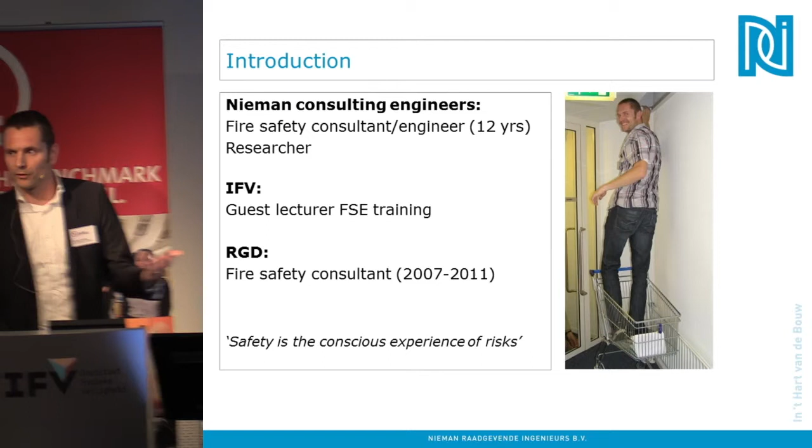I'm the fire safety consultant. And at the IFV here, I'm a visiting lecturer in fire safety training, including fire safety engineering. And I was seconded for the State Building Service as a fire safety engineer. So I'm involved mainly at the front end of operations. And I'm from the practice, but I see very few fires in practice. And I'm peripherally involved in the trials in Zutphen, but that's also very peripheral.

This shows me in a different capacity. In safety engineering, they often describe safety as a deliberate experience of risks. I'm taking a certain risk here, and the question is whether this was deliberate. Retrospectively, perhaps it may not be, because one of those shopping carts can handle about 110 pounds. Well, I'm slim, but I'm not that slim.

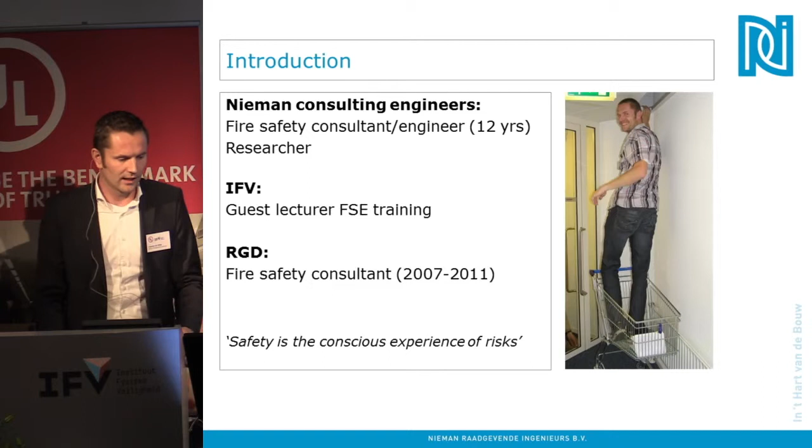So you might say that the subconscious experience of risks figures in our fire safety in buildings as well, because we observe rules and think that they feel safe to us and comfortable. So we accept a residual risk without knowing what that residual risk is. So how aware are we of our risks?

If you look at rule-based, you might encounter these situations. I don't know whether these all relate to rules, but I'll tell you about a few of them. At the upper left, they decided they wanted a sign warning us about geese. And there is a warning sign there. But we don't have a picture of geese, so we put a cow on instead. So you might wonder, what do you need to watch out for, cows and geese, or neither of the above?

At the lower right, there's a road here. And apparently there are a lot of things you're not allowed to do, so perhaps you'd have to stop and take a look to see what's not allowed here. And probably you need a sign to denote every single rule and prohibition. And what went wrong at the upper right, you don't know whether that relates to rules. Perhaps each apartment at the upper right needs to have a balcony, whether or not the balcony is accessible. Well, that's pretty odd if you wind up in one of those buildings.

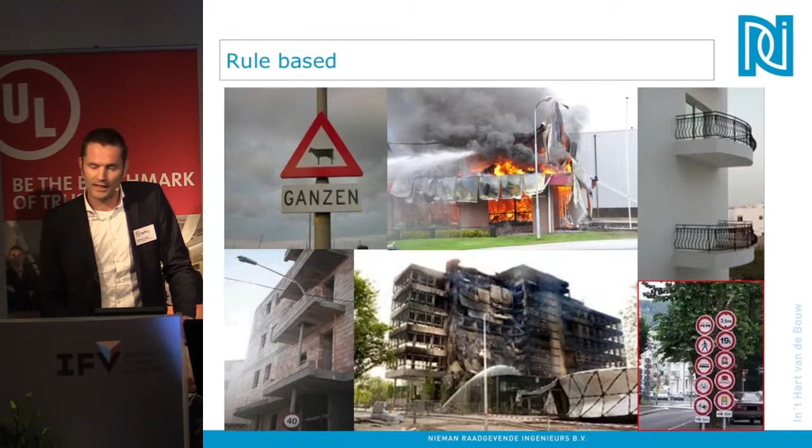Now, if you look at fire safety and look at the middle two pictures, well, they're entirely in compliance with the rules. You see that TU Delft, which is burned down, and you can see that a burned out building fits perfectly within our regulations. And we thus accept a lot of risks.

Now, zooming in on those regulations, if you look at the Construction Act, there are two targets: preventing casualties by fire and preventing fire damage to adjacent premises. Uitgebrand - think of those pictures. It's perfectly easy to have a building burned down without any victims or the fire spreading to the adjacent buildings.

And the other targets don't figure in our regulations. Think of loss prevention, whether it's material or immaterial, or social damage, or sustainability. Those are private objectives, and they're not regulated.

Well, what do the regulations serve? They concern rule-based performance requirements, which target safeguarding a certain level of fire safety. There are no specific objectives in the order of magnitude of victims or loss, and the safety consequences of those buildings vary. So you can have one set of regulations, but they don't have the same safety consequences. And the principle is ideal use of buildings.

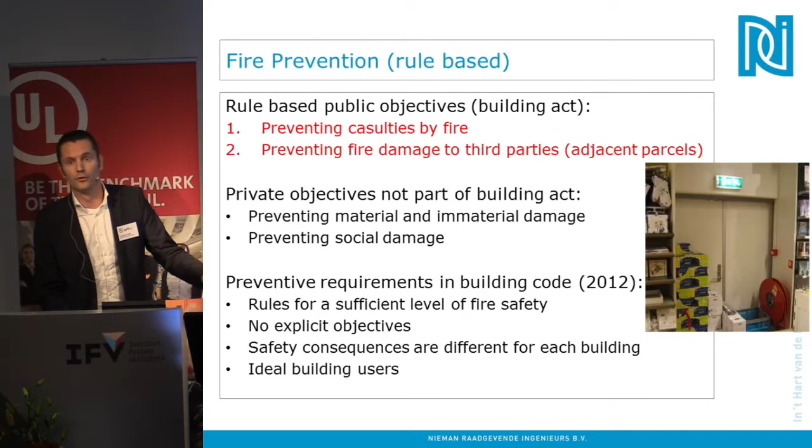And you need ideal building users. Well, you can beg to differ on that, because building users are not ideal and they do what they think is best.

Now, what matters most? Rules or objectives? About the rules, if you look at them, what happens with those performance requirements?

You review the threshold value for each order of magnitude, which means that the review is not qualified at all. Either it's satisfactory or it isn't. Often there's no cohesion between the different orders of magnitude and units. So that's why rule-based review needs to be straightforward and easy to emulate, but the result is that you haven't

optimized fire safety. So if you look at escapes and evacuations, there's a distance and a width and a flow pattern and mutual cohesion, and that mutual cohesion defines the fire safety level.

And fire is often approached as a single unit, one of a kind. For example, buildings have a certain thermal load, so fire conditions such as the source of the fire and how the fire manifests, as well as the building and the consequences of that building for the scenario, as well as the user features, are rarely taken into consideration.

Well, you could say that you need to do this when you want rule-based fire safety and fire prevention. For example, with aging demographics and with the same rules, you're likely to have more victims because the elderly become less and less independent, and evacuation takes more time.

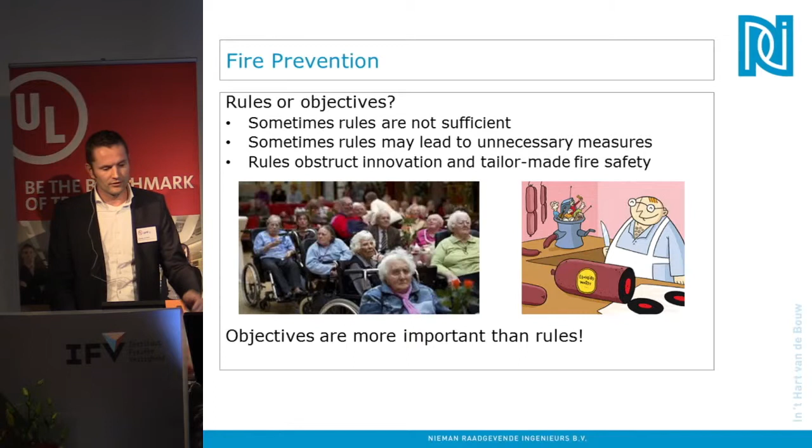So objectives are more important than rules. And you can say that objective-based fire prevention sounds nice. How do I implement this?

First, you carry the two objectives from the building regulations over into sub-objectives, and you could identify those by considering the functional requirements from the building code. They could be safe surroundings, safe building. Think about the structures, safety compartments, and safety of escape routes and safety of attack routes.

Well, this sub-objective might be nice, but how can you quantify it? You could consider the acceptable failure risk, and that won't really help you because an acceptable failure risk is not defined anywhere. You might assume that a lower acceptable failure risk will be inversely proportionate to the safety.

How do you determine the acceptable failure risk? You can compare it with a building that directly meets the regulations, or you use it as a benchmark to determine the acceptable failure risk.

And those sub-objectives are linked. You can imagine that failure of a compartment will affect the safety of the surroundings and the safety of escape routes. You can't assess those sub-objectives separately.

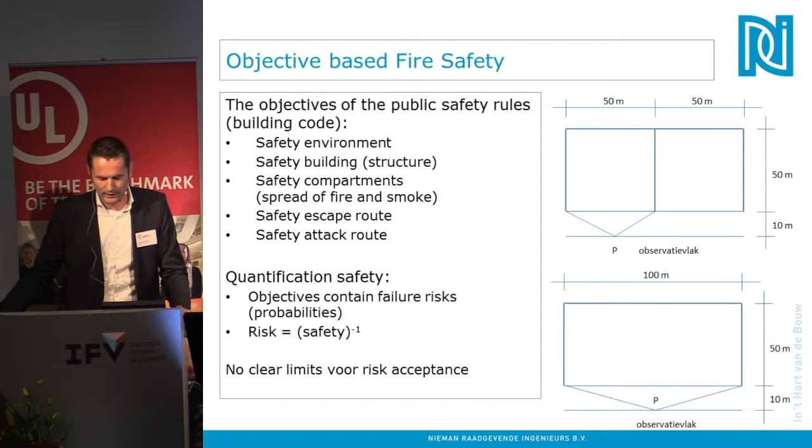This is often overlooked in equivalent solutions. Usually they focus only on the effect. They don't consider the total failure risk or the total risk of those subsystems combined.

Besides, you need to consider the boundary conditions. I mentioned it earlier. If you look at objective-based fire prevention, you need to consider the fire, and you can make something project-specific only if you look at the specific building in a fire scenario. Now, fire conditions such as building, interior arrangement, and opening factor all figure.

And their role may vary depending on the sub-objective. Take the building boundary condition. If you're looking at the safety of the surroundings, you don't want the fire to flash over outside the building. And if it does exit the building, it's more likely to be dangerous to adjacent buildings.

That's a high risk. If the fire is small and contained in the building, then the risk to the surroundings is very limited, and you might say that's less dangerous. Well, if you have a large building in between or a large facade, that is more of a burden to adjacent premises. But the opposite holds true for escape routes.

With escape routes, you might want the fire to be outside the building, and then the smoke and heat are exited, and the escape routes remain intact for a long time. But it's more dangerous if it's a low building, because then the escape routes are obstructed very quickly. With a higher building, there's some buffer capacity so that the escape routes can be used longer.

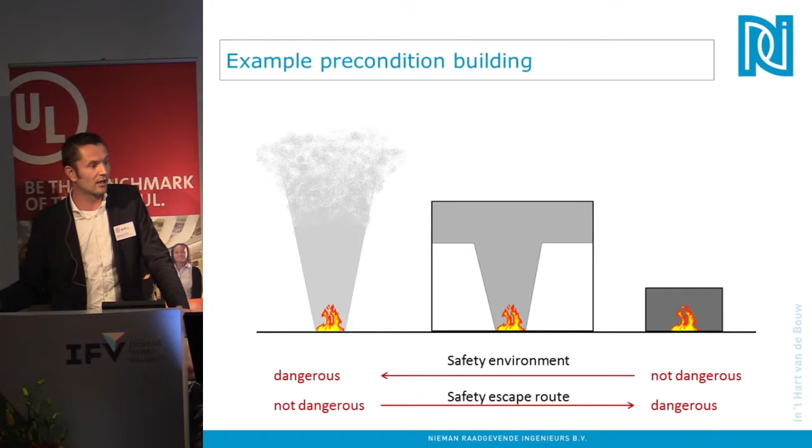Now, objective-based fire safety. You could subdivide the way of doing this. I just suggested you could work with sub-objectives and failure risks. Specifically, I've listed 3 methods.

You could assume the natural fire concept. I mentioned this earlier. It's important to look at the actual fire capacity scenario, trying to predict at the front end what fire scenario would materialize in a building. You can also calculate the thermal load on persons and structures more realistically, and based on that, assess for that building whether the risk is acceptable.

...the decisive incident. It imposes a local load and may obstruct escape routes near that fire, but at a certain point the temperature in the space rises so high that there's flashover, and that changes from a local fire to a compartment fire. The compartment fire is often the decisive incident, as we notice in our regulations, which emphasize the link to a compartment fire with a certain thermal load according to the standard fire curve.

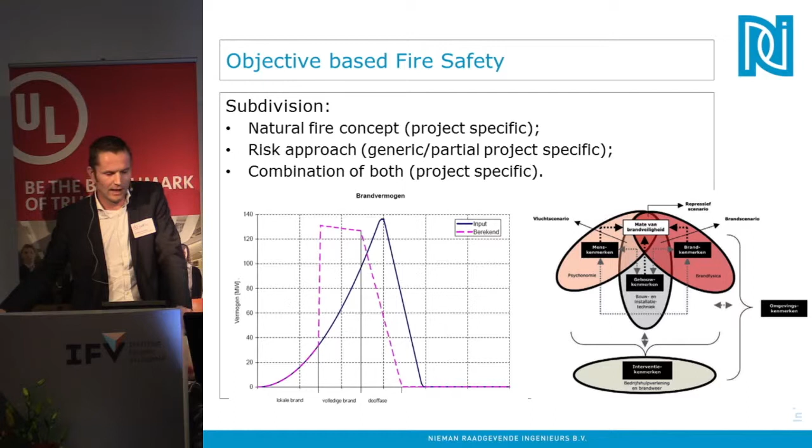That's from the book Foundation for Fire Safety. You have fire features, building features, and people features, and you'll need to assess those combined. Our regulations include them minimally or not at all.

Now, here's an example highlighting the natural fire concept. You see the hospital in Amsterdam, the OLVG. It has a central disclosure route via the light street, denoted here as 1A and 1B. You enter here - this is the central access pathway. These are large movement areas, as indicated on this photograph, large long walkways.

And there's some plaza squares for specific clinics where people wait to visit the ambulatory clinics in the adjacent spaces - so these areas. These ambulatory clinic spaces have an input and output system, with natural and mechanical input and output, and it was once dimensioned to enable a local fire scenario and to safeguard fire safety based on the idea of a small fire...

...in one of those larger walking areas. Now, the partitions between the ambulatory clinic area and the adjacent compartments require a WBDO of 30 minutes. Now, this WBDO cannot be foreseen in the structure. The structure does not allow fire resistance for 30 minutes.

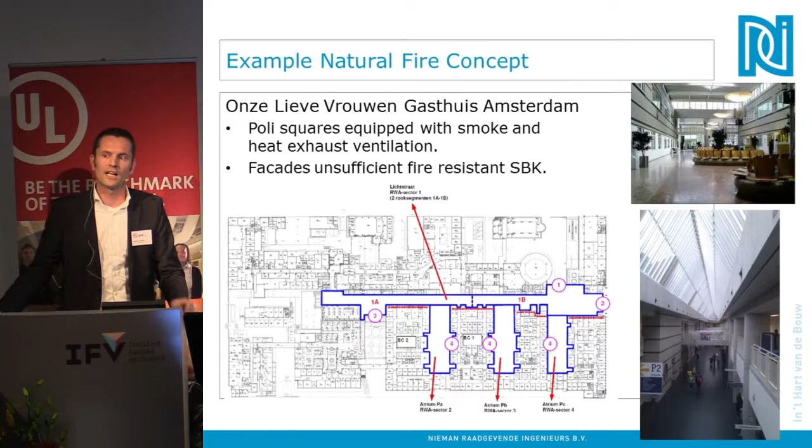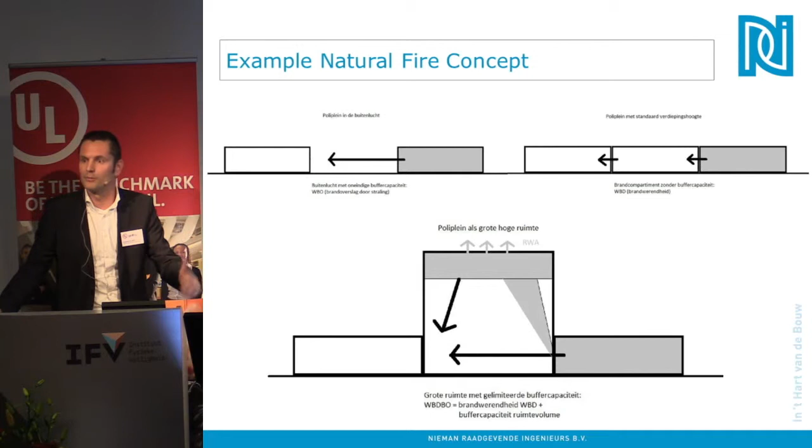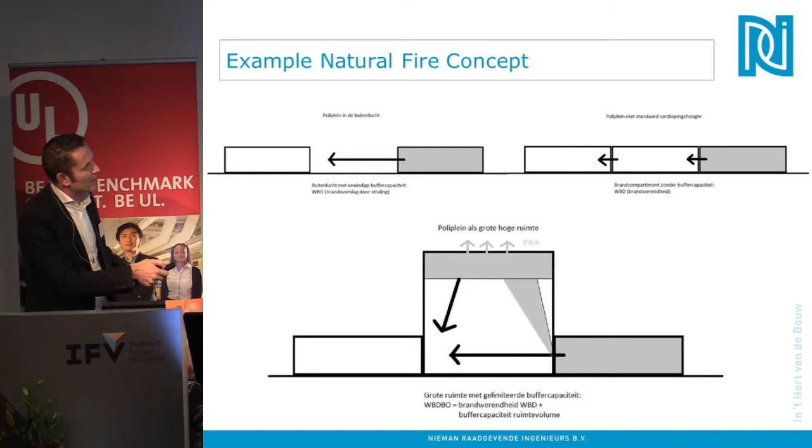As for the interior, the WBDO automatically yields fire resistance. So the partitions ensure 30 minutes of fire resistance, and they don't allow for the buffer effect of the space in between. If you look at the exterior structures, and the distance between both structures is sufficiently present, then an infinite buffer effect is assumed because smoke and heat can exit here, and you don't really need a fire-resistant partition. So that means you get fire resistance of 0.

Now, the situation in this hospital is somewhere in between. The buffer capacity is considerable, but it's not infinite.

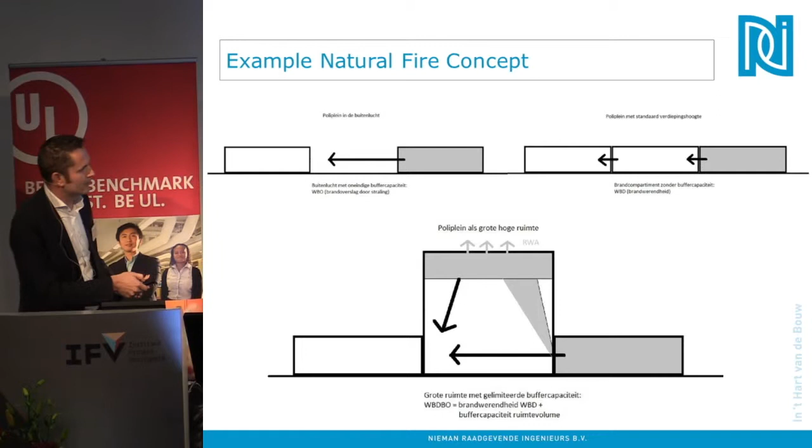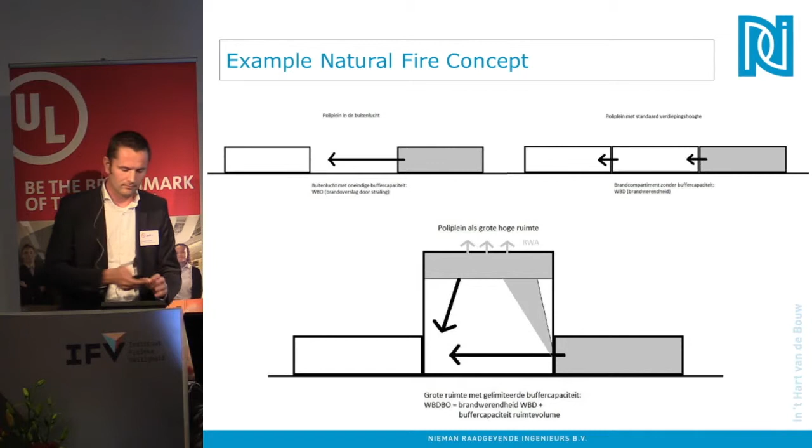So rule-based 0 to 30, you can't pinpoint it in between, you can pinpoint it there. The WBDO is guaranteed through the existing partitions and the buffer effect of that space, which takes the facilities present into account, including the RWA system.

Now back to the sub-objectives. We're dealing with the sub-objective of compartmentalization and safe escape conditions. So the idea is to gear fire prevention based on the likelihood of the failure risk, so the interpretation meets regulations. We do this by considering the buffer capacity together with fire resistance ability so that you get that required 30-minute window.

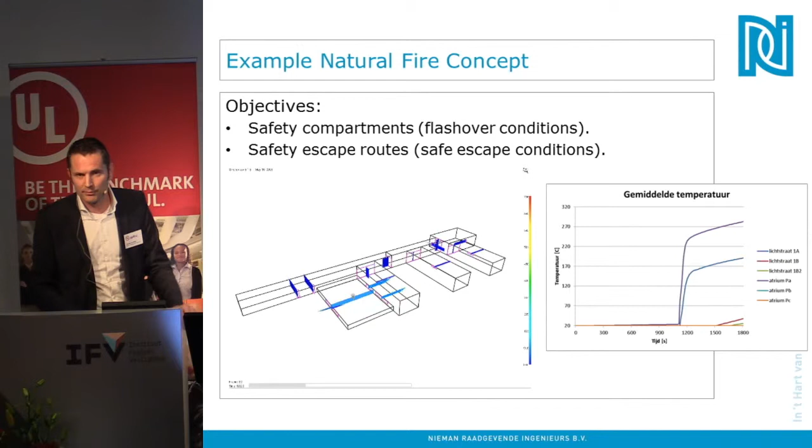What you see here is a simulated fire, and that fire and the fire capacity scenario is based on all the features in this building. So this considers the arrangement of glass and frames on this front.

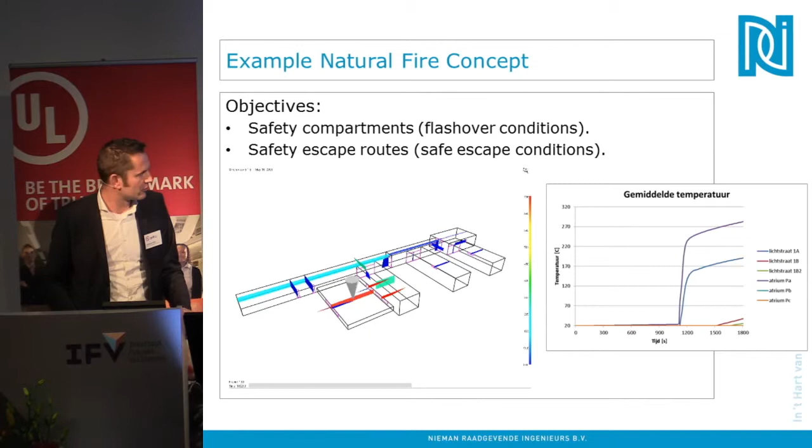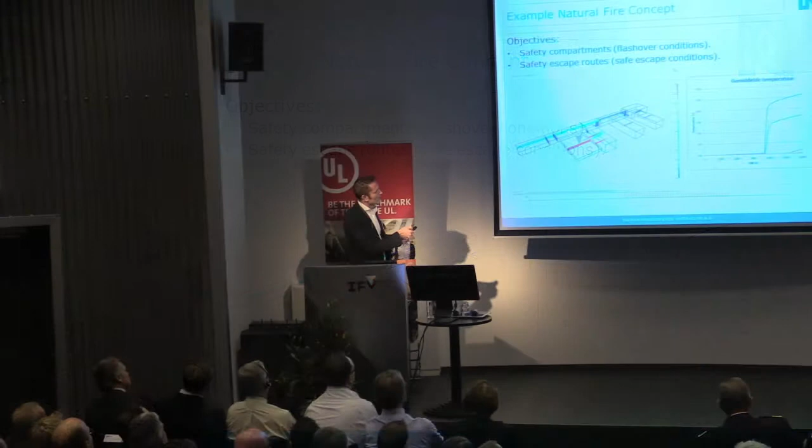So the calculation has assessed possible courses for different settings, and heat and smoke might disseminate to the adjacent ambulatory space and the walkway, and then they see whether the space conditions in both places might not exceed the threshold value for flashover, because if they do exceed that value, then the fire spreads to other compartments. So what the RWA does is it keeps the boundary conditions low enough to avert flashover and spread of the fire to those other compartments.

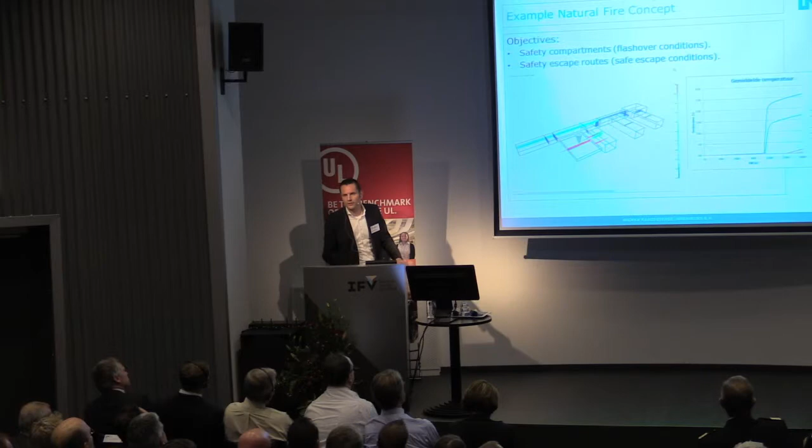The temperature is depicted in far too small a range. That's why we have a graph disclosing the thermal load here. You can see the temperature on the y-axis, and the horizontal axis as time. So you see that after flashover, so after the glass on those facades has succumbed, then it spreads to the atrium, and with this RWA capacity, the temperature drops below the threshold value for flashover. So that way you're meeting the requirements.

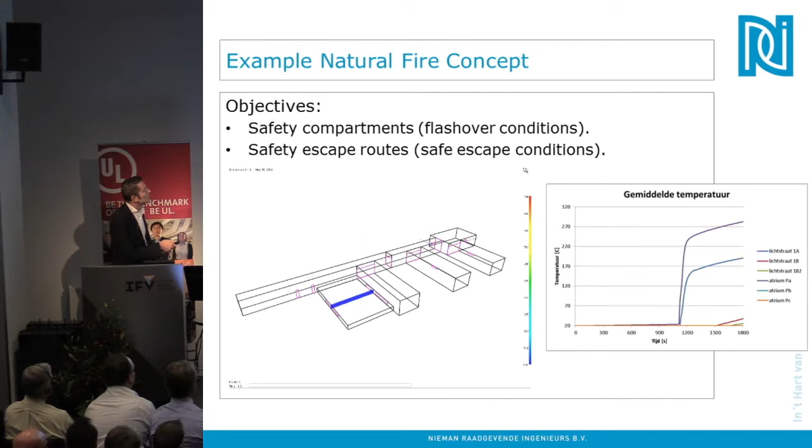You can do the same to guarantee safety of escape routes. You could see the radiation load over time.

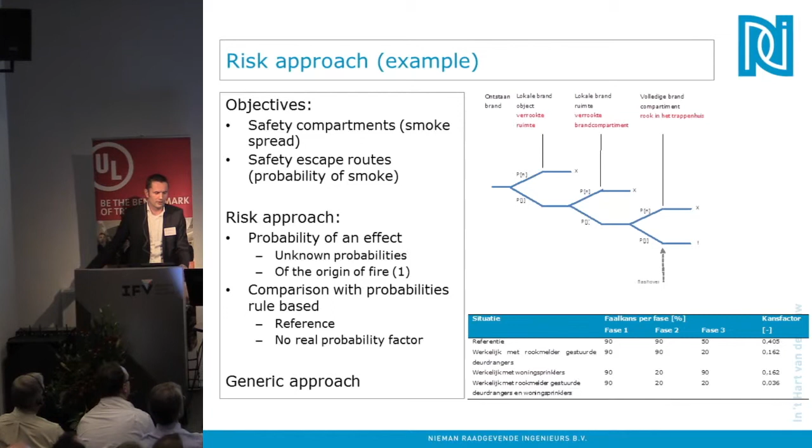Here's another example, a risk approach. You could apply a risk approach linked to the cascade model. Here you see a simplified structure of the cascade model depicting a few steps of three stages, and it always starts when the fire erupts. In this case, expansion to a local object, expansion to a local fire in space, and ultimately a total fire in this compartment.

In this example, we examined smoke dissemination from a home to a stairwell, where the stairwell is directly adjacent to that home, as you often have in entranceways. They didn't focus on the fire expansion, but on the smoke obstruction that comes with that fire expansion. And the smoke comes before the fire in all cases, so when there's only a local fire, the area is already filled with smoke.

So what you do at this point, if you run through the cascade model, you'll need to determine the failure risk for each step, and those failure risks are not established anywhere, so you have to either estimate them or assess them based on statistical data. Well, they made an effort to estimate it here, and you can see the equation. It's not so much the actual likelihood identified, it's more about the equation. And the equation is a benchmark situation that, once again, directly meets building regulations.

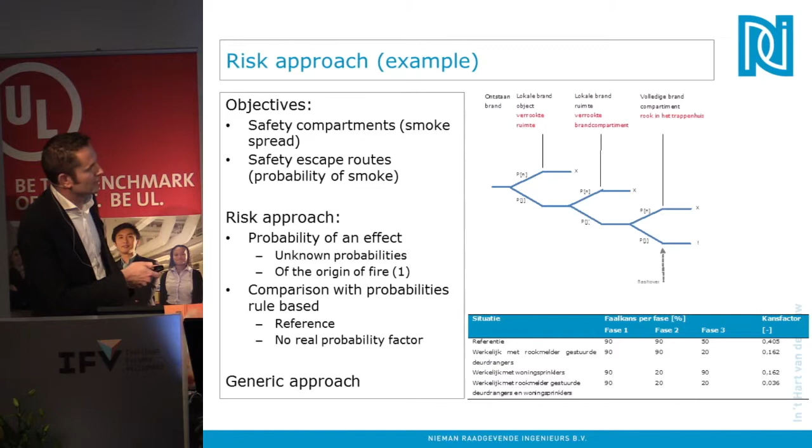So a home that is adjacent to a stairwell in a gateway, and since 2014, in the gateways of new construction, you need a certain doorstop. So they've assumed a traditional doorstop here. We compared this with a smoke alarm-driven doorstop, so the reliability with a smoke-driven doorstop is slightly higher than with an ordinary doorstop.

They compare this with a home that has fire sprinklers, and one that has the smoke alarm doorstop and the fire sprinklers. You don't need exact figures because this is an equation, a comparison, both in the benchmark and in the actual situation. Those figures are identical, so it doesn't really matter how high or how low they are.

The extreme appears here, with the smoke dissemination from phase 1 to 2. In 90% of the cases, that smoke does spread, and that enables you to compare the different likelihoods in each stage. You see the resultant factors, the likelihood per situation, and in the final phase, between a smoke alarm-driven doorstop and a normal doorstop, there's a considerable margin of difference. That's a matter of opinion, but the reliability of such a doorstop is probably better than a standard doorstop, so you're introducing a measure of safety.

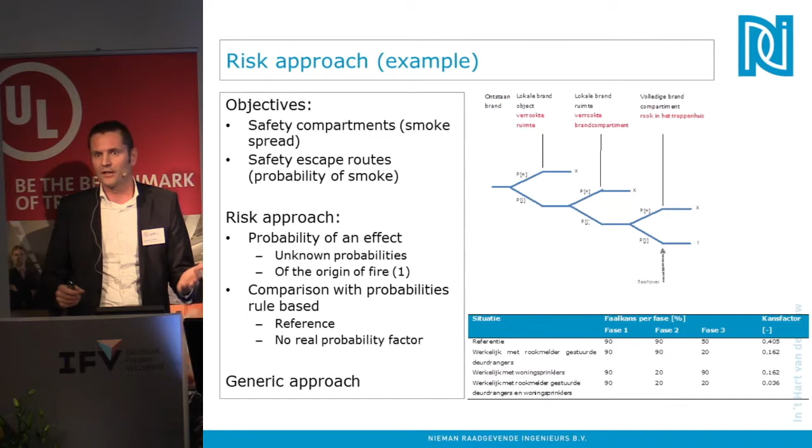Now, to avoid dwelling on this specific example, this just shows one way you could structure your risk approach to target a solution. This is basically a generic solution, although semi-project specific, because you do consider the actual facilities present. Now the final example is somewhat more abstract.

When you start relating those risk factors to a realistic fire capacity scenario, you get a customized solution. To do this, you apply the risk factor to the physical fire scenario. Initially, the fire capacity scenario is based on the different factors of capacity within the building, and then you multiply that and apply the risk factor.

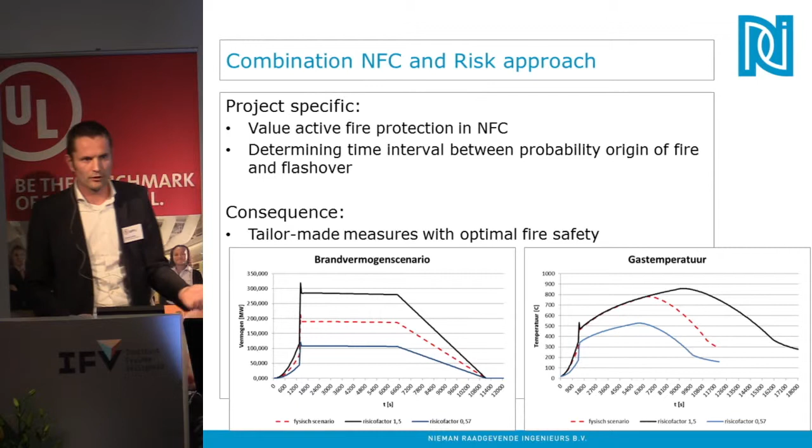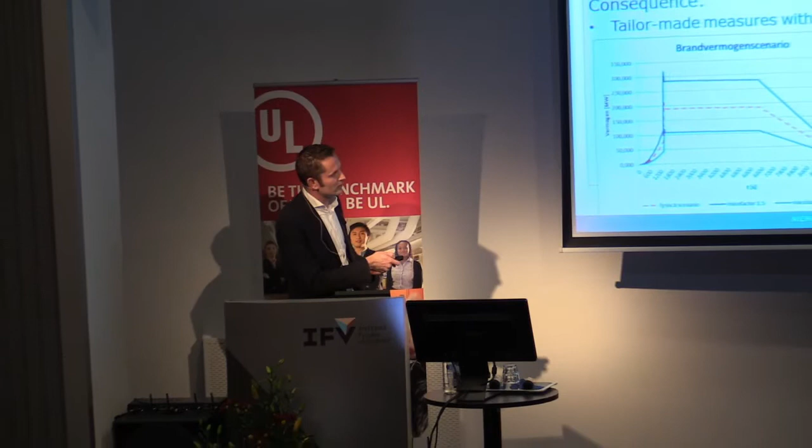That corresponds with certain specific active fire safety facilities you have to add, versus a situation where you do nothing and perhaps merely enlarge the compartment. So the possible result is different scenarios with different capacities, which yield a different thermal load on structures or persons. In addition to the height of that thermal load, its duration comes into play.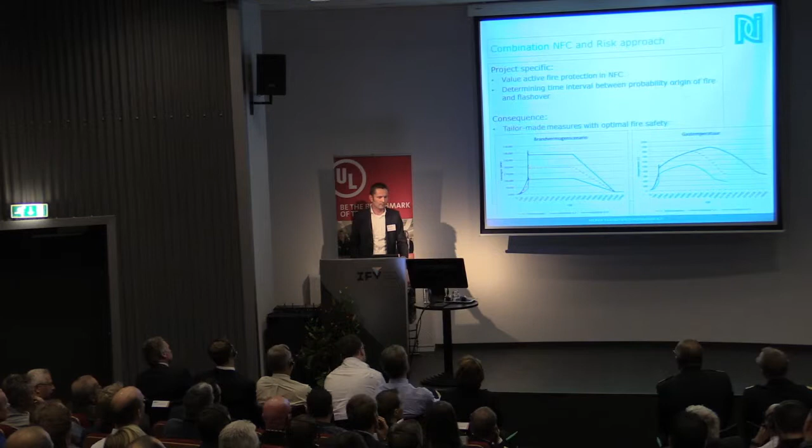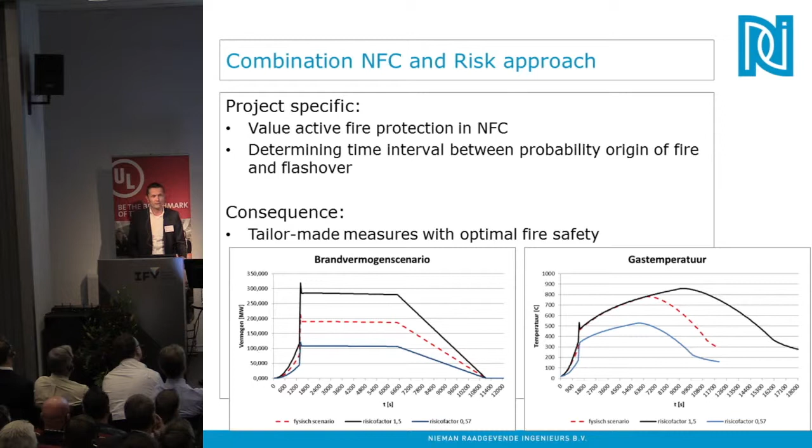So we see that when we have more active fire provisions, the duration drops. I won't elaborate on this, but if you simply examine the building code functions and realistic fire scenarios and compare them, you'll see a world of difference. If a building is used as an office, then the fire scenario is entirely different from premises used as a shop or for industrial purposes.

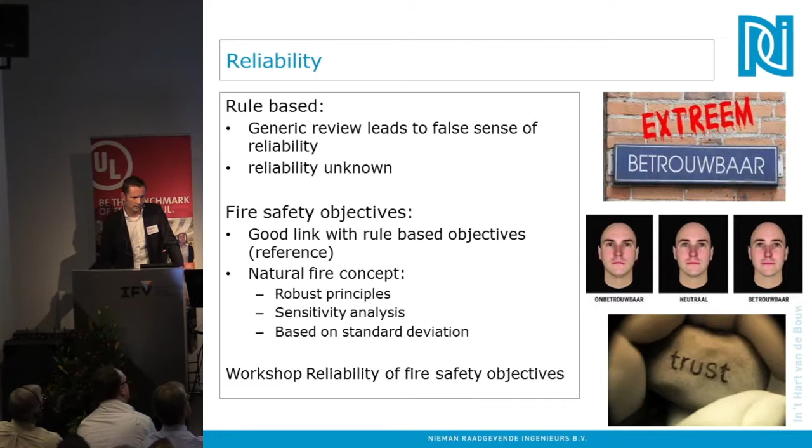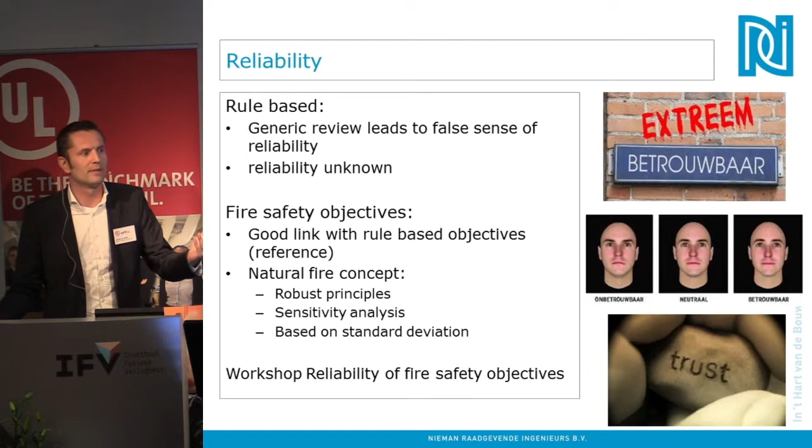That means reliability matters, especially in those project-specific custom solutions. What you can rely on is paramount. And we see a false sense of safety and reliability when we're talking about rule-based fire prevention, because people think that standard solutions are too reliable.

But if you look at a shop with an interior arrangement, then the WBDO may not be high enough, it may be much too low for the thermal load. Whereas with a different function, such as an office function, that WBDO of 60 may be too high. So there's a false sense of safety with respect to rule-based solutions.

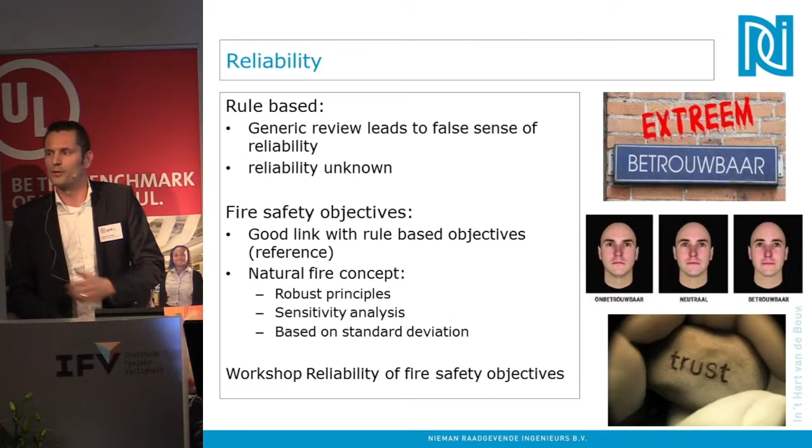So the objective-based solutions are jeopardized because people rely on rules. The moment we deviate from them, we want to create a certain sense of reliability. This reliability is simply achieved by believing somebody's pretty blue eyes. So that reliability is personal, and that's not right. The reliability should be determined by other factors.

Now, in objective-based fire prevention, the way to achieve this is by linking it properly to the rule-based objectives. So you use the benchmark situation to disclose the residual risks accepted within the regulations, and then you see how reliable the objective-based fire prevention can be.

Of course, the natural fire concept is based on a lot of principles. You need the principles to be robust, and that may vary depending on the situation—there's no straightforward answer. What should be necessary is that you always perform a sensitivity analysis of the decisive fire conditions. In addition, you might want a sensitivity analysis that uses standard deviation.

Now, this afternoon we'll have a workshop on reliability of fire safety objectives, which will elaborate on how to structure that reliability.

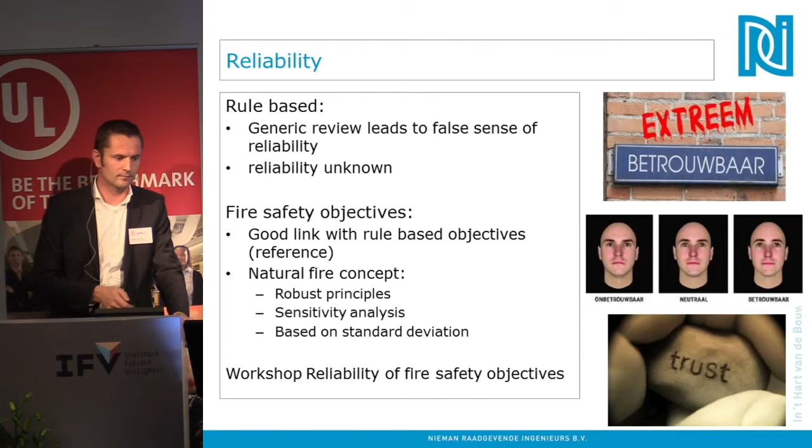That takes me to the conclusion. To sum up: objectives are more important than rules. Think in terms of objectives and try to get solutions based on those objectives. It won't impede innovation—with rules, innovations tend to be complicated. If you think in terms of objectives, you can solve any situation as long as you pursue the same objectives.

Objective-based fire safety is possible by applying sub-targets to structure objective-based fire safety. One is the natural fire concept, which assumes project-specific facilities, a risk approach, or a combination of the two. And if you go to customized solutions, you'll optimize fire safety—the rules we have might already be optimal, but this will give you a false sense of what's optimal.

Now, the reliability of those fire safety objectives is very important, and that needs to improve. All too often we simply ad-lib and don't have a clear sense of the reliability.

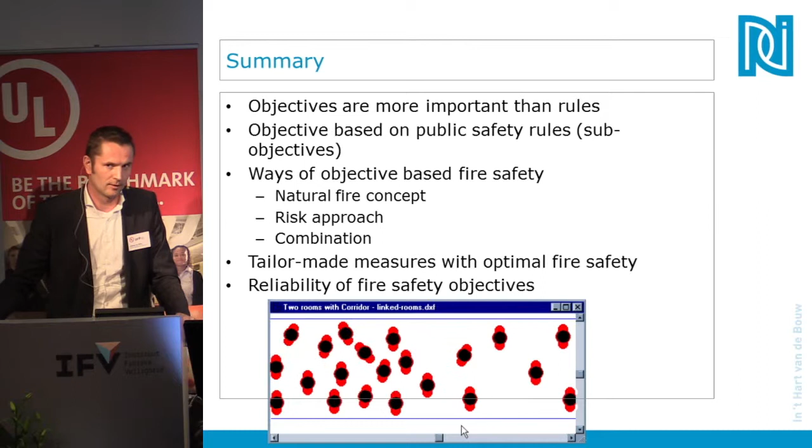Now, please run the video. What I'm trying to explain here is that you see one character going against the tide—that's the objective-based fire prevention. We don't do enough of that yet. The mainstream is rule-based. Let's reverse that and focus more on objective-based fire safety, so that soon this pattern will be the opposite.